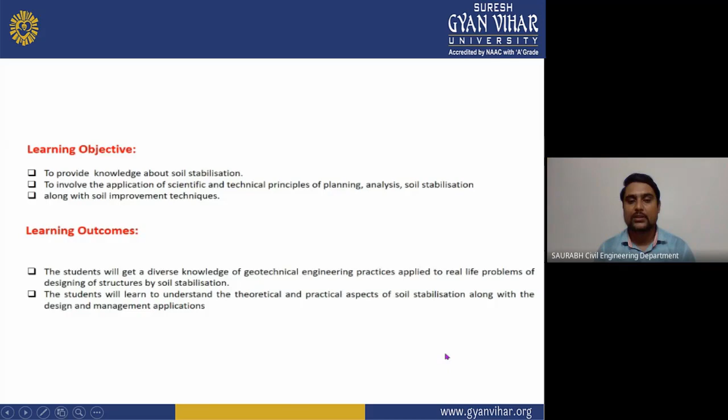So come on to our topic. First one is soil stabilization. Here we will see what is the definition of soil stabilization. Generally, soil stabilization is termed as the improvement process under the situation when the influence zone is limited to less than 1 meter, which is called surface stabilization.

It is a geotechnical process of improving the engineering properties of soil. In properties of soil, density and shear strength, and C and phi factor are improved, while compressibility, settlement, and permeability are reduced, making it more stable and durable. This is called ground improvement.

Stabilization of soil implies the modification of the properties of the soil, water, air system in order to obtain lasting properties which are compatible with the particular application.

The parameters involved are properties of soil to be stabilized, planned improvements, project economics, construction techniques, and maintenance of the project. These are some parameters which are involved in soil stabilization.

What is the objective of soil stabilization? We will see here. The main objective of soil stabilization is reducing the volume of voids, which is equal to reducing porosity. Filling the voids that cannot be eliminated is equal to reducing permeability. Increasing the bonding between grains is equal to increasing mechanical strength.

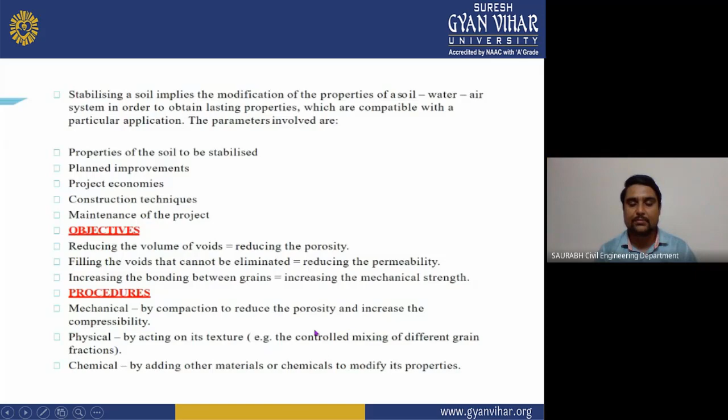There is also a procedure, and there are three procedures which are used in soil stabilization: first mechanical, physical, and chemical procedures. So here is the procedure. As I told you, there are three procedures: mechanical, physical, and chemical.

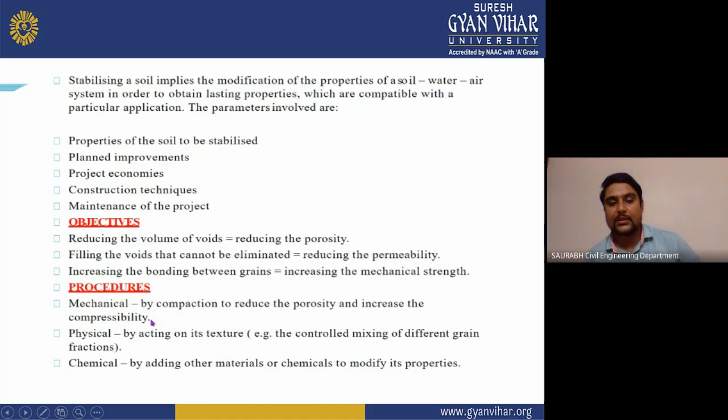Come on to surface stabilization. What is surface stabilization? Surface stabilization can be done by four methods: mechanical stabilization, physical stabilization, chemical stabilization, and physiochemical stabilization.

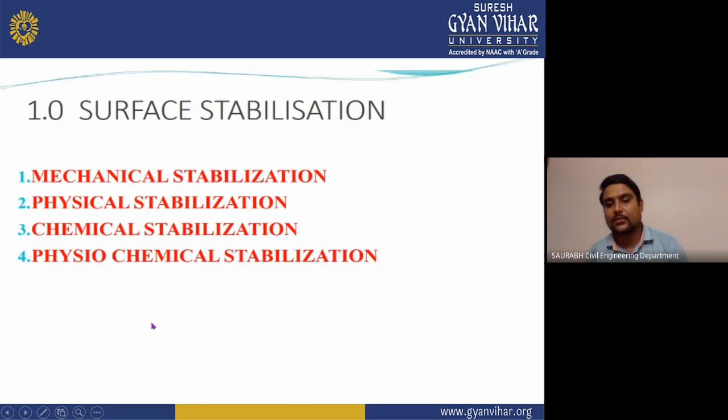Come on to mechanical stabilization. In this technique, mechanical energy is used, like roller plate compaction, by the choice based on the nature of soil to improve the soil properties by compaction, preferably for the construction of embankments for roads, railways, etc. Mechanical stability depends on the degree of compaction. Normally, compaction is done at the optimum water content.

What are the uses of mechanical stabilization? It is the simplest method of soil stabilization to improve the subgrade of low bearing capacity, and is extensively used for the construction of base and subbase and surfacing of roads.

Here is mechanical stabilization, and we will see what factors affect mechanical stabilization. The mechanical stability of mixed soil depends on the following factors: mechanical strength of aggregate. The mixed soil is stable if the aggregate used has high strength. However, if the mixture is properly designed and compacted, even aggregate of relatively low strength can provide good mechanical stability.

Mineral composition: the mechanical stability of mixed soil depends upon the composition of the minerals. The minerals should be weather resistant.

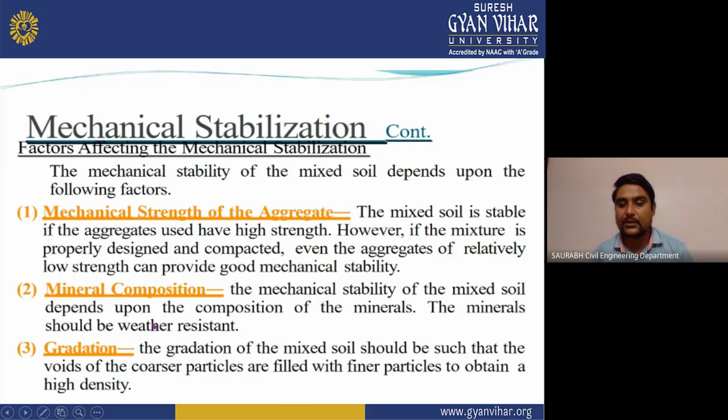Gradation: the gradation of the mixed soil should be such that the voids of the coarser particles are filled with finer particles to obtain a high density.

Here you can see the plasticity characteristics. For mud road surfacing, highly plastic soils are used as a binder. They possess greater cohesion, moisture retention capacity, and provide a seal against downward movement of surface water. For the base course, the soil should have low plasticity to avoid excessive accumulation of water and the resulting loss of strength.

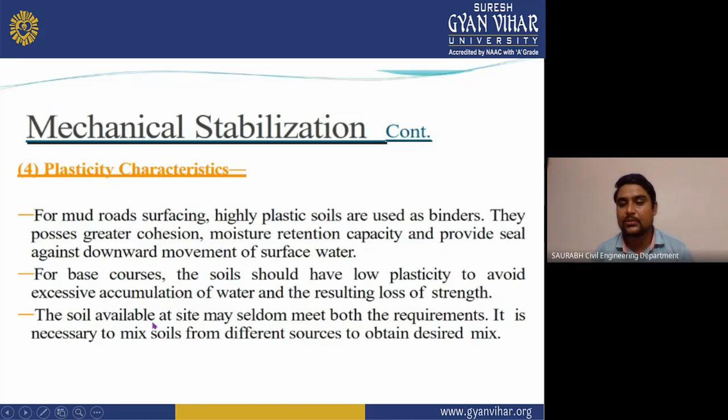The soil available at the site may seldom meet both requirements. It is necessary to mix soil from different sources to obtain the desired mix. Here is physical stabilization: in this technique, two or more soils are blended to improve the physical properties of weak soil.

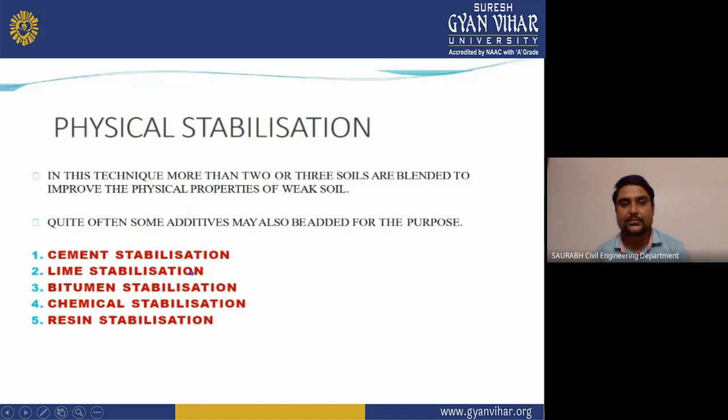Additives may also be added for the purpose of stabilization: cement stabilization, lime stabilization, bitumen stabilization, chemical stabilization, and resin stabilization. First we will see cement stabilization, the most commonly used for road construction.

Heavy clays are difficult to pulverize and not suitable. Well-graded sand and gravel mixture with up to 10% fine binding materials is preferred. Quantity of cement is determined on trial basis in the lab. Minimum strength required for this kind of soil is 3.5 Newton per mm square at 7 days cube strength. Compaction is to be done within 2 hours after laying and mixing with water. The central plant method is also faster construction, though expensive: dry mix, then wet thoroughly, followed by spreading and compaction.

The mix-in-place method is similar to an agricultural rotary cultivator. First the soil is pulverized, then dry cement is spread over it. Then water is sprinkled in a layer, remixed and shaped, and compacted using a roller.

Here is cement stabilization, normal soil-cement stabilization. It consists of 5 to 14% cement by volume, sufficient to produce a hard and durable material. Sufficient water is used for the hydration requirement and workability. It is weather resistant and strong, used for stabilizing sandy and other low plasticity soils.

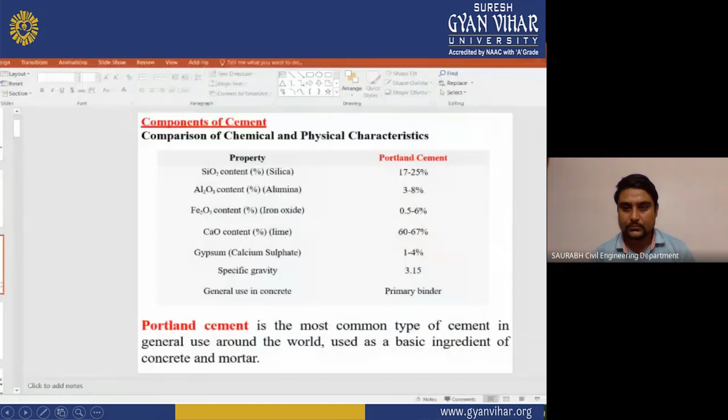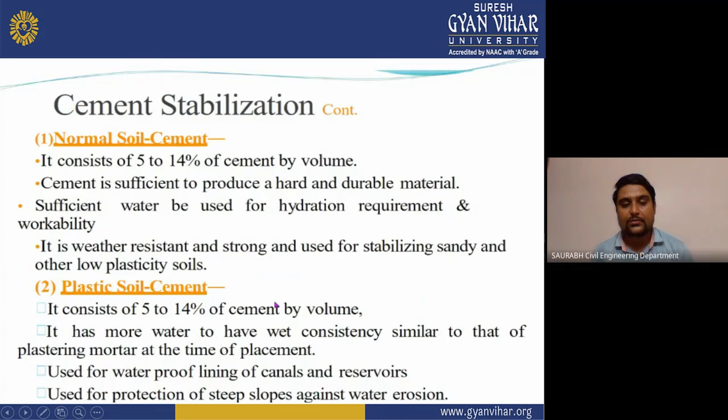It consists of 5 to 14% of cement by volume. It has more water to achieve a wet consistency similar to that of plastering mortar at the time of placement. It is used for the waterproof lining of canals and reservoirs, and for the protection of steep slopes against water erosion.

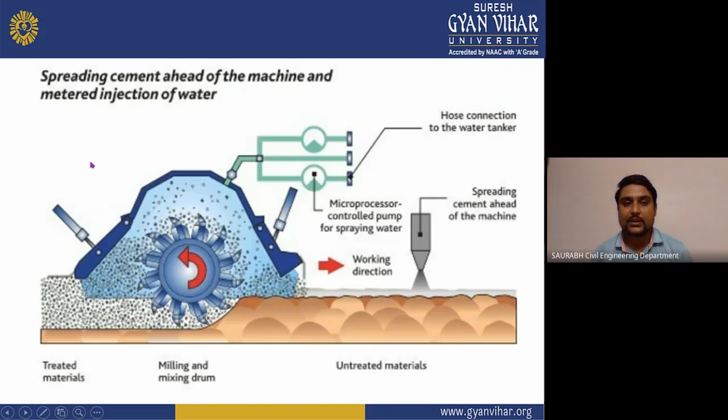Here you can see the treated material, and this is the milling and mixing drum, and that is the untreated material. This shows spreading, where cement is spread ahead of the machine and metered and injected with water. Now you can see the soil stabilization using cement, known as GLORIT Step 3.

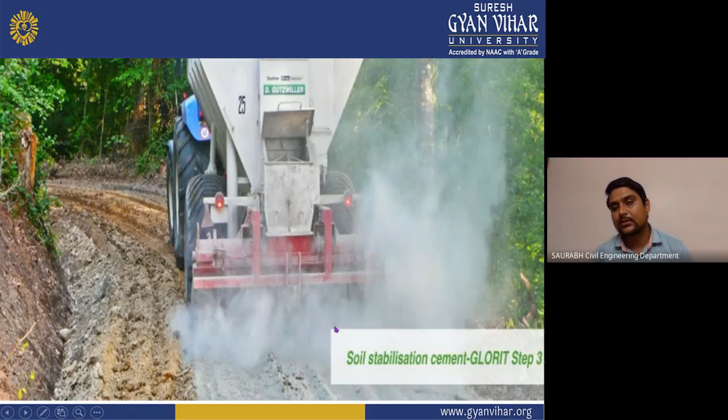Now we will see lime stabilization. There are basically five types of lime: high calcium quicklime, hydrated high calcium lime, dolomite lime, normal hydrated dolomite lime, and pressure hydrated dolomite lime. Quicklime is more effective than hydrated lime, but the latter is safer and more convenient to handle, so generally hydrated lime is used. It is also known as slaked lime.

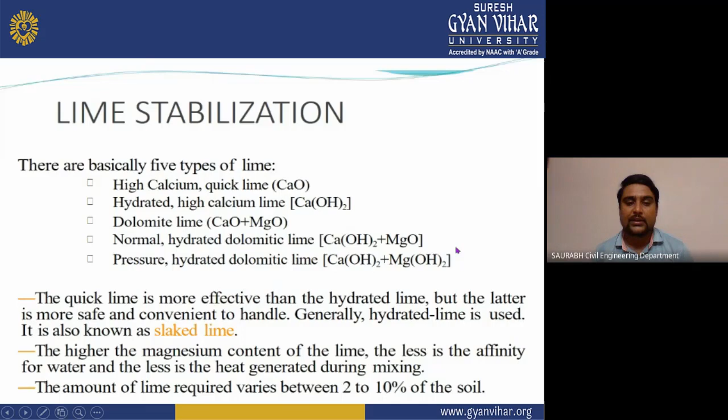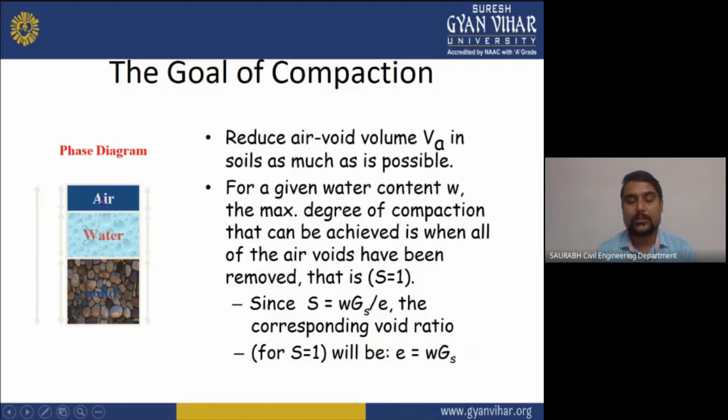What is the main goal of compaction? We will see this first diagram, showing air, water, and solids. The goal of compaction is to reduce the air voids volume VA in the soil as much as possible. For a given water content W, the maximum degree of compaction achievable is when all the air voids have been removed, that is, saturation S equals 1. Since S equals WGS upon E, the corresponding void ratio for S equal to 1 becomes E equals WGS.

Now we will see the principle of compaction. The degree of compaction of soil is measured by the dry unit weight. The dry unit weight of soil increases as compaction is done. The more compacted the soil, the higher its dry density compared to normal soil, and the higher its dry unit weight gamma D will be.

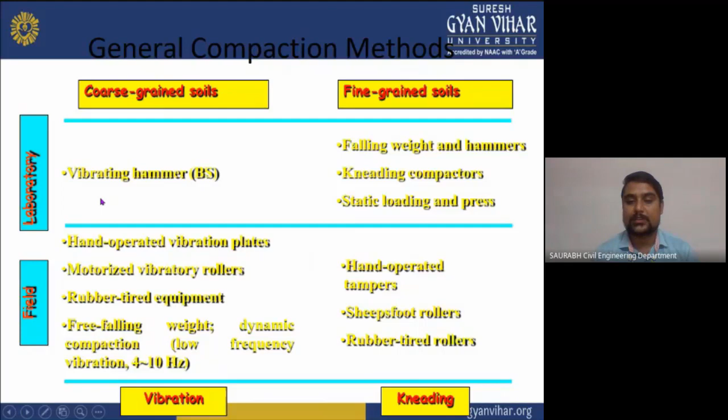In the laboratory, we have to use a vibrating hammer, known as BS. For fine grained soil, we use the falling weight and hammer, kneading compactor, and static load and press. In the field we use hand operated vibrator plates, motorized vibrator roller, rubber tire equipment, free falling compaction vibration weight and dynamic frequency, and hand operated tamper. Sheepsfoot roller and rubber tire roller are also used for soil compaction, along with the standard Proctor test.

First we will see the standard Proctor test, and how we conduct it.

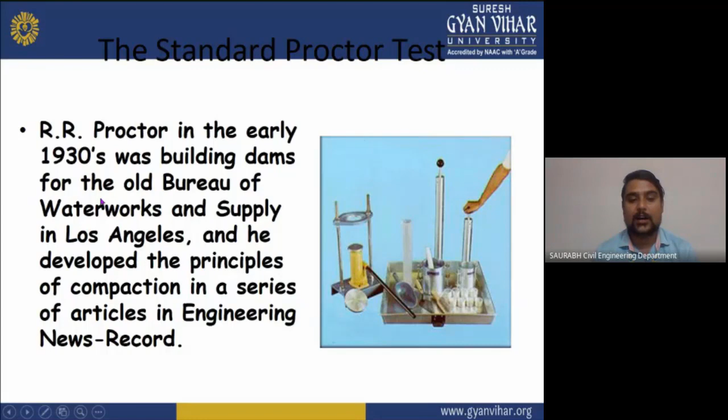R.R. Proctor, in the early 1930s, was building a dam for the old Bureau of Water Works and Supply in Los Angeles, and he developed the principle of compaction in a series of articles in Engineering News-Record.

Variables of compaction are shown here. Proctor established that compaction is a function of four variables. First is dry density, represented by rho d or dry unit weight gamma d, then water content W, compactive effort energy E, and soil type gradation, presence of clay and minerals.

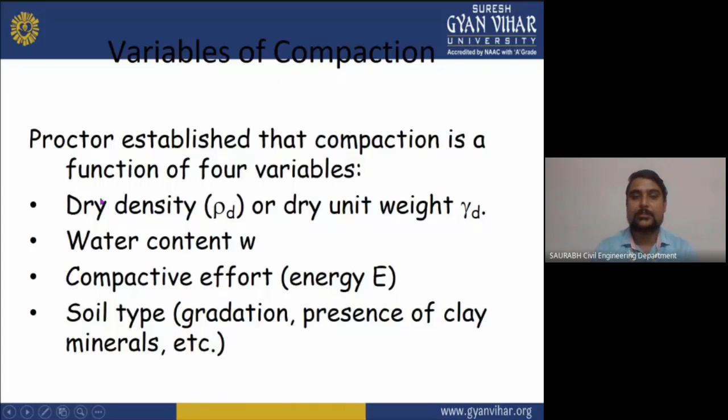These are the variables which affect compaction, and you can also say this is the compaction function for the variables. Now we will see the compaction Proctor test here.

As you can see here, first is the standard Proctor mold, required one piece. Standard Proctor hammer will be required, one piece. Extruder will be required, one set, and square pan will be required, one set.

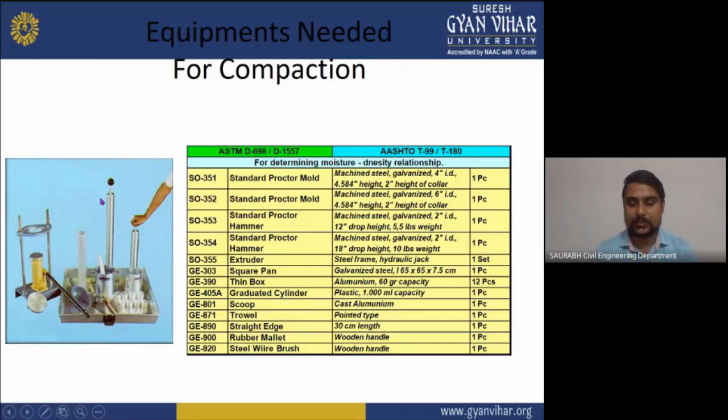Tin box will be required, 12 pieces. Graduated cylinder will be required, one piece. Scoop will be required, one piece, and trowel will also be required, one piece. These are the equipments needed for doing the compaction of soil.

The soil standard Proctor test: the soil is mixed with varying amounts of water to achieve different water contents. For each water content, the soil is compacted by dropping a hammer 25 times onto the confined soil.

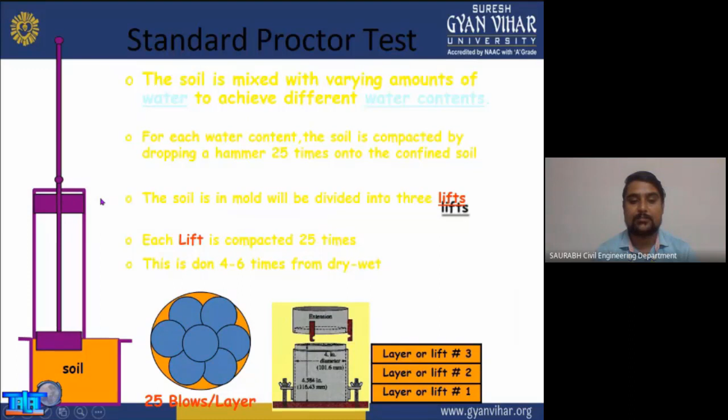The soil mold is divided into three lifts. Each lift is compacted 25 times, so each soil sample is divided into three layers, and each layer is compacted 25 times. This is done 4 to 6 times, and this will be the pattern of doing the compaction here.

Now, what is the standard energy? Standard energy is also a factor involved in the compaction of soil. Compactive effort applied to the soil per unit volume is shown here in the graph, which we have to plot during the compaction by the standard Proctor test.

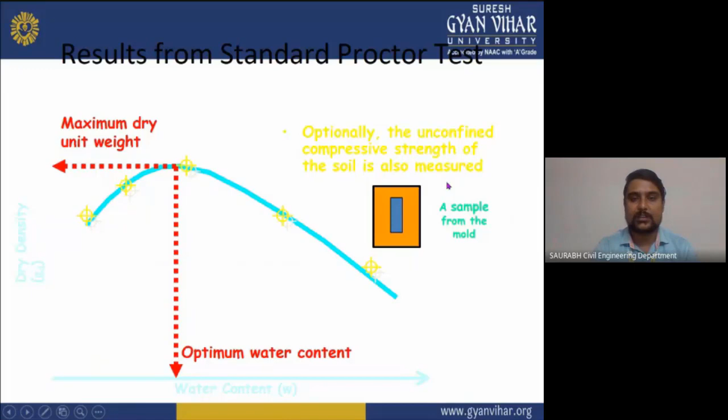Now we will see the Proctor principle of compaction using standard energy. If a series of soil specimens are compacted at increasing water content, the resulting dry density of the specimen will vary. The density will increase to a peak value, then decrease.

So you can understand what we have to do. We have to vary the water content, and then we will get the maximum density. Then we stop, and at that point we get our MDD, known as maximum dry density, after which the density will decrease as mentioned here.

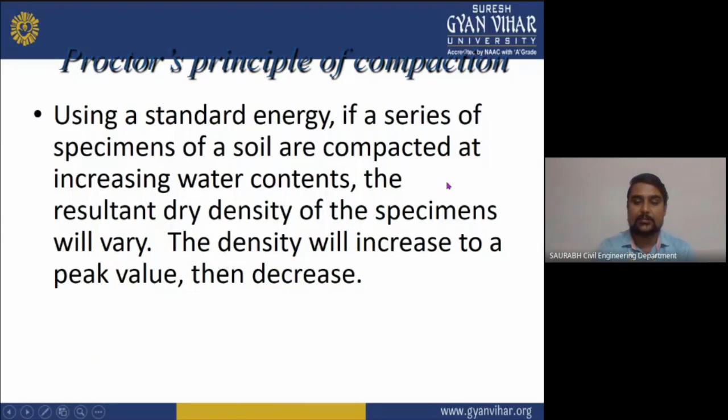Principle of compaction: a plot of dry density versus the water content from the compaction test will be parabolic in its shape. The peak of the curve is termed the maximum dry density, as I told you, MDD, and the water content at which the peak occurs is the optimum water content, which is known as OWC.

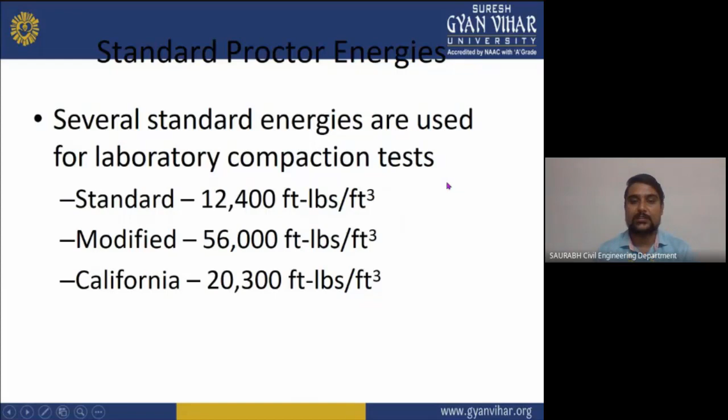And here, several standard energies are used for the laboratory compaction test. The first one is standard, then modified, and California, and there are different values of energy involved in doing the compaction of a soil. Now we will see the summary of a standard Proctor test here.

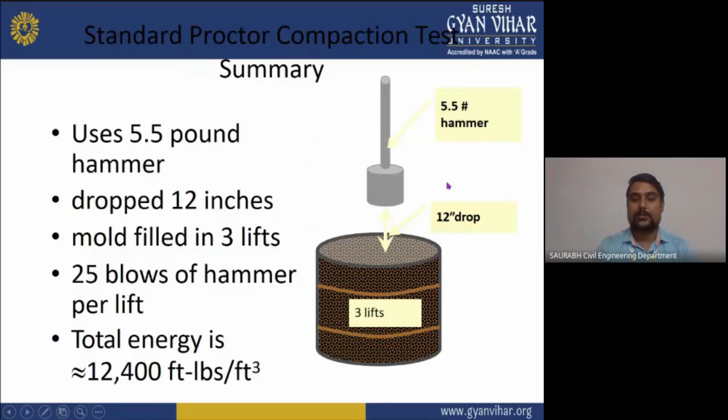As you can see, there is your hammer, which has a weight of 5.5 pounds, and there is also the drop distance, which is given here as 12 inches. It uses a 5.5 pound hammer, a 12-inch drop, the mold filled in three lifts, 25 blows of the hammer per lift. The total energy consumed here, as you can see, is 12,400 foot-lbs per cubic foot. And here, as you can see, is the same thing.

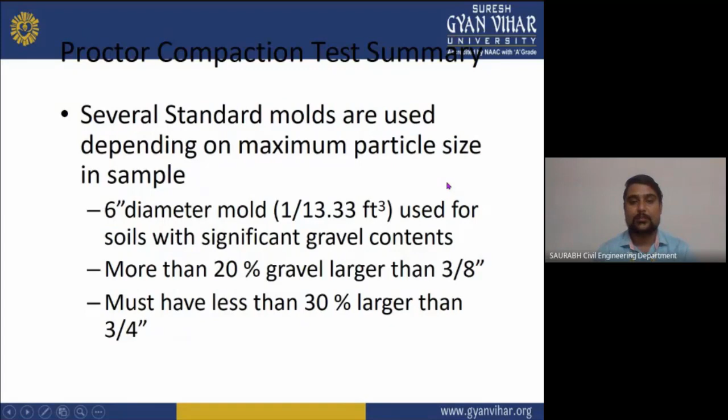Now we come to the several standard molds used depending on the maximum particle size of the sample. A 4-inch diameter mold, which is equal to 1/30 cubic feet, is used for the low gravel content method, a soil with less than 20% gravel. Method B is for soil with greater than 20% gravel and 20% larger than 3/8 inch.

And now we come to how you have to do the compaction Proctor test. First, you have to prepare 4 to 5 specimens at increasing water content about 2% apart. For example, prepare samples at 14, 16, 18, and 20%. Use a range of moisture based on feel and experience.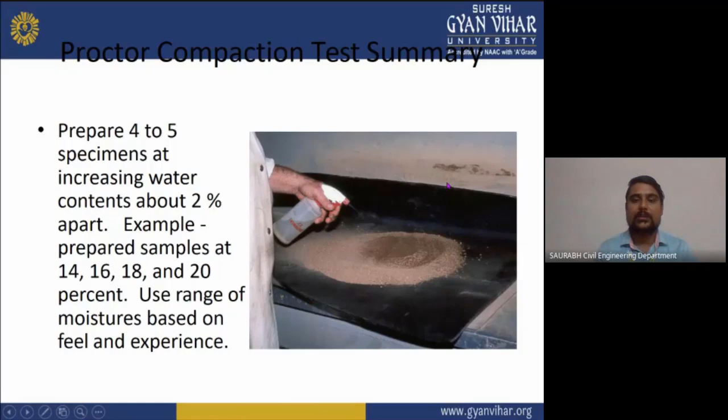Like here, as you can see, you have to use the water content in the soil. First you use 14%, after that 16, 18, 20, and you have to repeat this percentage of water in the soil until you get your maximum dry density. Here you can see the Proctor compaction test summary.

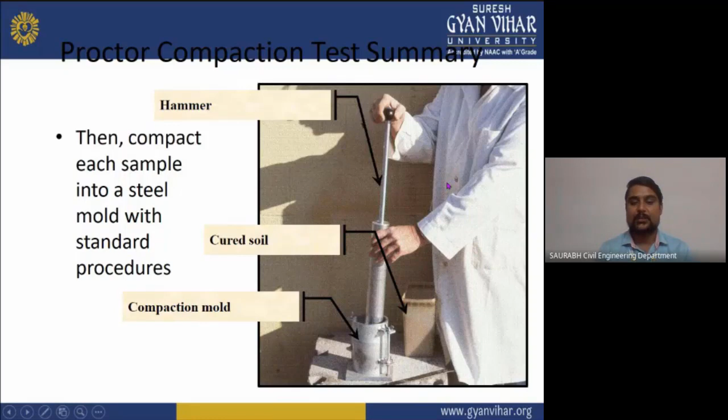The hammer then compacts each sample into the steel mold with the standard procedure, and the cured soil is here and the compaction mold is also here. Now we will see what will be next. Then strike off excess soil so that the mold has a known volume of soil. As you can see here, we have to strike off the excess amount of soil from this mold so that we can get the exact volume of soil.

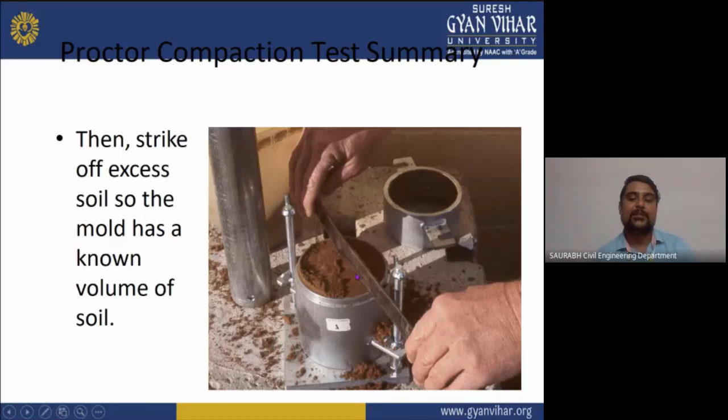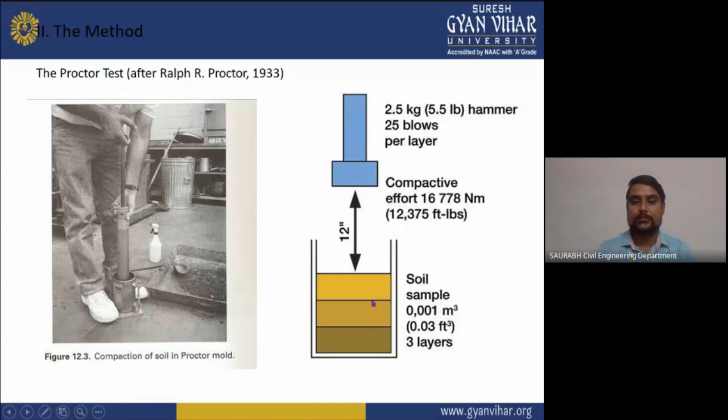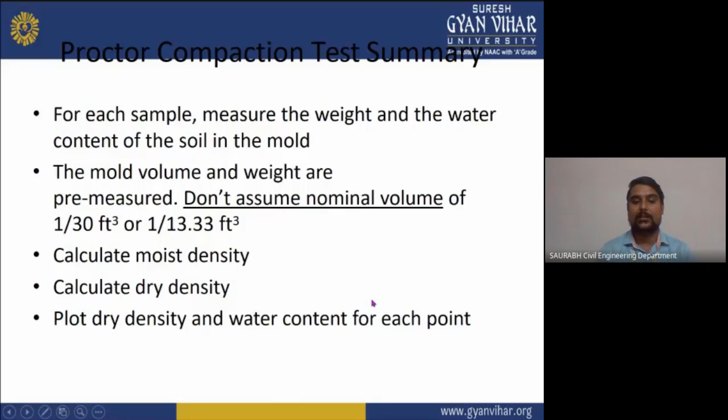And now, what we have to do in the Proctor compaction test summary: for each sample, measure the weight and the water content of the soil in the mold. The mold volume and weight are pre-measured. Don't assume nominal volume of 1/30 cubic feet and 1/13.33 cubic feet. Calculate the moist density, calculate the dry density, and plot dry density and water content for each point.

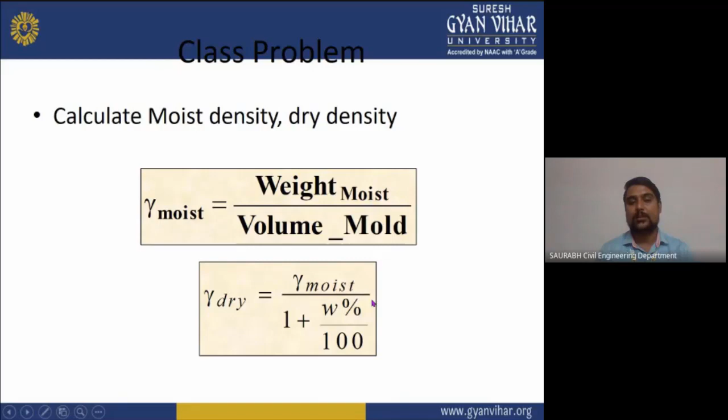As you can see here, what is the problem? Calculate the moist density and dry density. This will be the formula which we will use during the calculation of the moist weight of a soil. As you can see here, this is your formula.

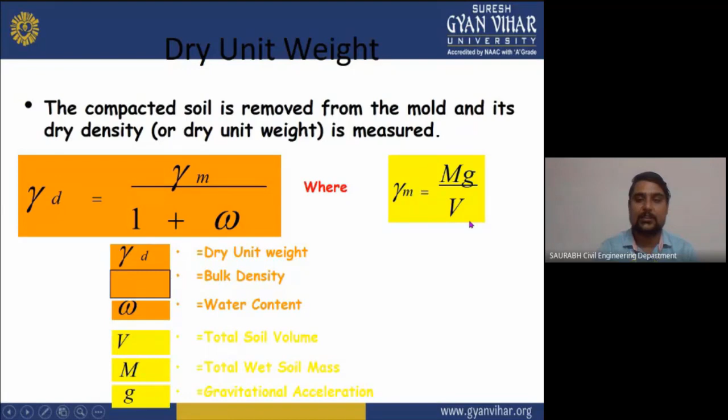And now we have to see the dry unit weight. The compacted soil is removed from the mold and its dry density, which is also known as dry unit weight, is measured by gamma m upon 1 plus w. As you can see, gamma d is equal to dry unit weight, w will be the water content, V will be the total volume of soil, M will be the total mass of the wet soil, and g will be the gravitational acceleration. As you can see here, gamma m equals Mg upon V. We have to put the data in this formula, and we will get the dry unit weight of that soil.

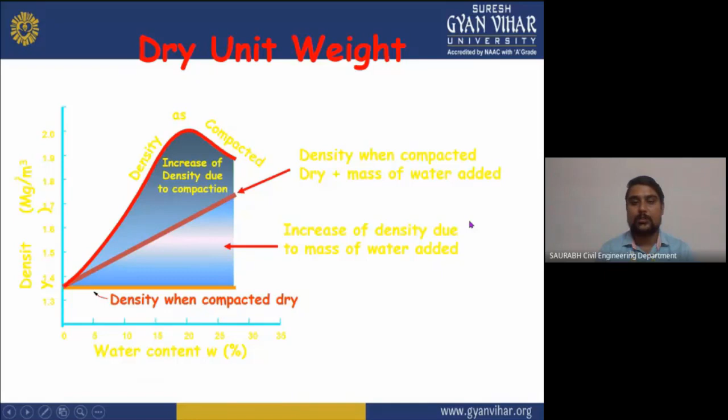And here is how the modified Proctor test was developed. Now we will come to the modified Proctor test. We have done the standard Proctor test. It was developed during World War II by the US Army Corps of Engineers for a better representation of the compaction required for airfields to support heavy aircraft, as you can see here.

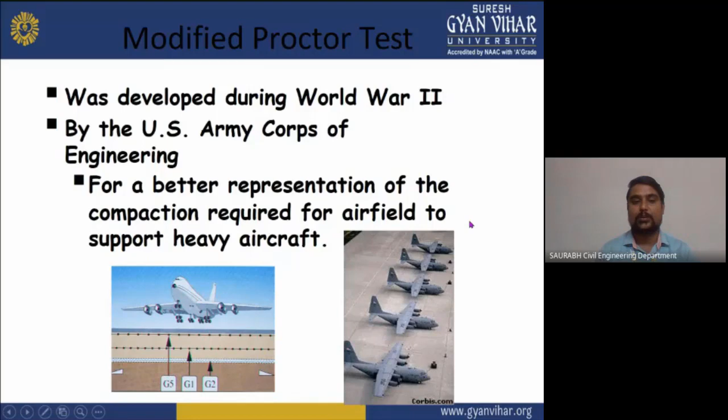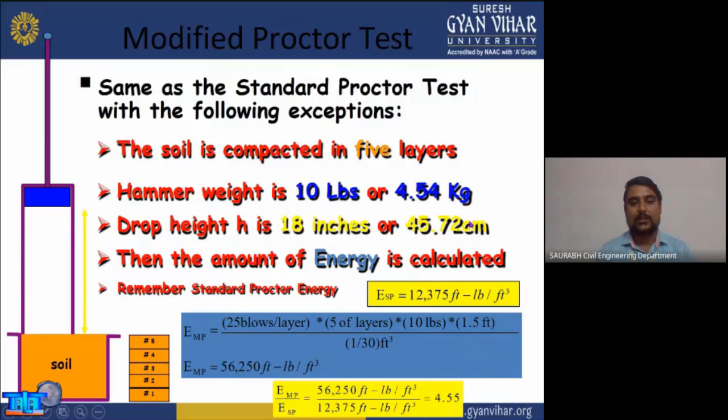The modified Proctor test is the same as the standard Proctor test with the following exceptions. The soil is compacted in 5 layers, the weight of the hammer will be 10 lbs, and the drop height will be 18 inches. That is the difference between the modified Proctor test and the standard Proctor test, and this is the graph of a modified Proctor test and a standard Proctor test. You can see here.

Now we will see the comparison summary of the standard Proctor test and modified Proctor test. Mold size will be 1/30 cubic feet, and here will also be 1/30 cubic feet. 12 inches is the height of drop, and here the height of drop is 18 inches. 5.5 lb hammer, and the weight of hammer will be more in the modified Proctor test, and there will be 3 layers in the standard Proctor test, and there will be 5 layers. And this is the difference, which is very important to know: what is the difference between the standard Proctor test and the modified Proctor test.

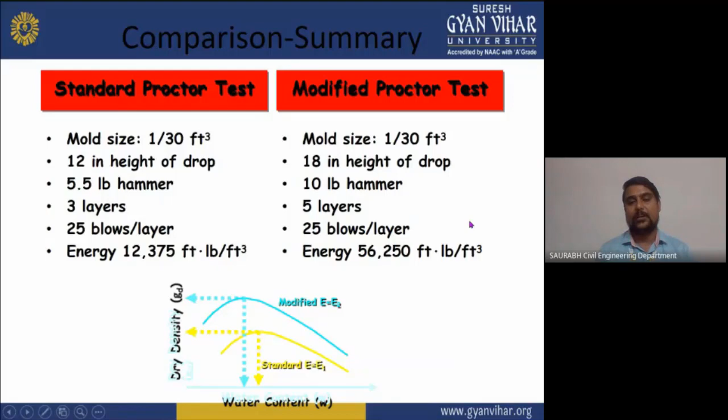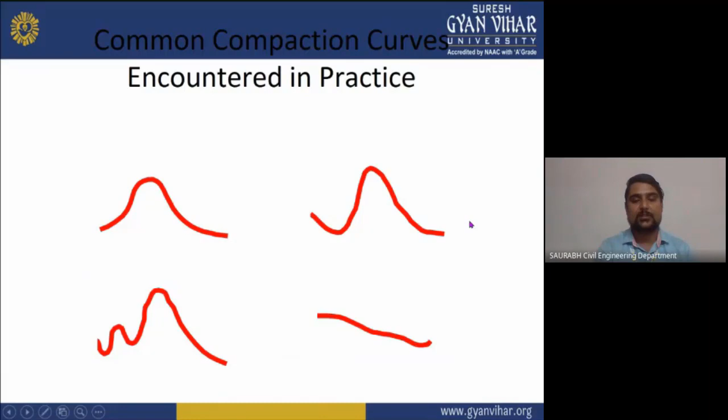Now you can see this is the curve which you will get during the compaction of a soil. Now we will see what is the zero air voids. As you can see here, the figure is showing the dry density and water content relationship, and this is also known as the degree of saturation graph. And ZAV, as you can see here, is known as zero air voids. The curve represents the fully saturated condition, where S will be equal to 100%, and ZAV cannot be reached by compaction.

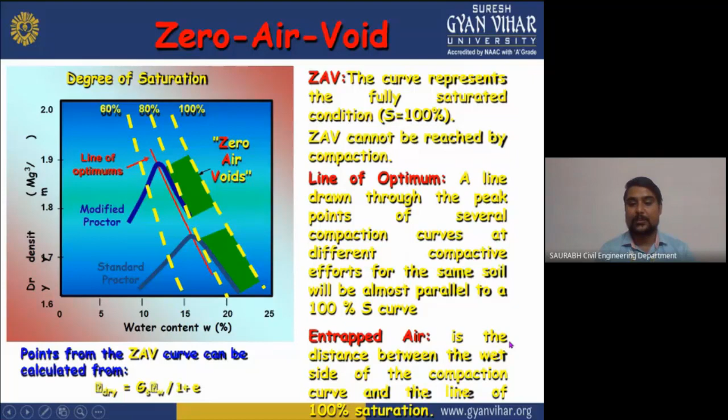Line of optimum: as you can see here, a line drawn through the peak points of several compaction curves at different compactive efforts for the same soil will be almost parallel to the 100% S curve. And there is also entrapped air, as you can see here in the graph. It is the distance between the wet side of the compaction curve and the line of 100% saturation.

Now we will see the results. What will be the results on the dry of optimum? As the water content increases, the particles develop larger and larger water films around them, which then lubricate the particles and make them easier to be moved about and reoriented into a denser configuration. Here is also hammer impact: the air expelled from the soil upon impact is larger in quantity than the volume of water added.

And here is also wet of optimum. What is the meaning of wet of optimum here? Water starts to replace the soil particles in the mold, and since rho w will be less than rho s, the dry density starts to decrease. Hammer impact: what is the hammer impact? Moisture cannot escape under the impact of the hammer. Instead, the entrapped air is energized and lifts the soil in the region around the hammer. So these are the result explanations of compaction.

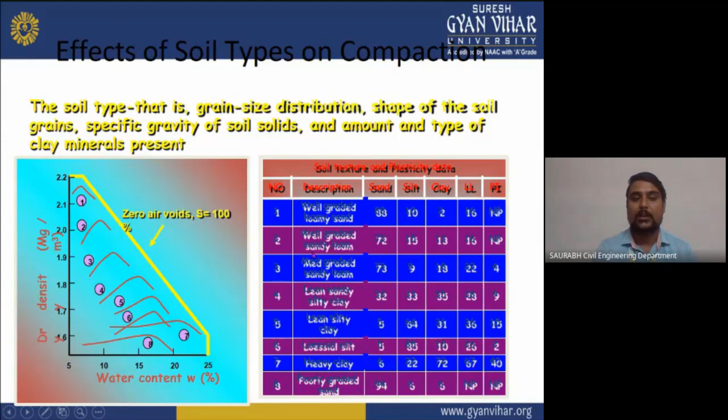Now we will see the effect of soil types on the compaction. What will be the effect of soil type on the compaction? The soil type, that is grain size distribution, shape of the soil grain, specific gravity of soil solids and amount and type of clay mineral present. As here you can see the compaction characteristics. What is the meaning of the compaction characteristics?

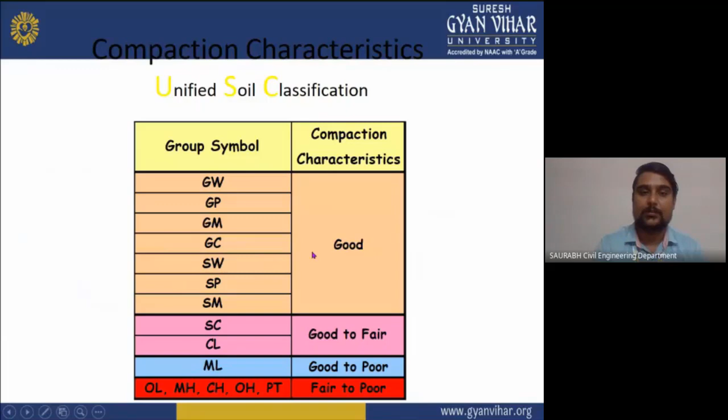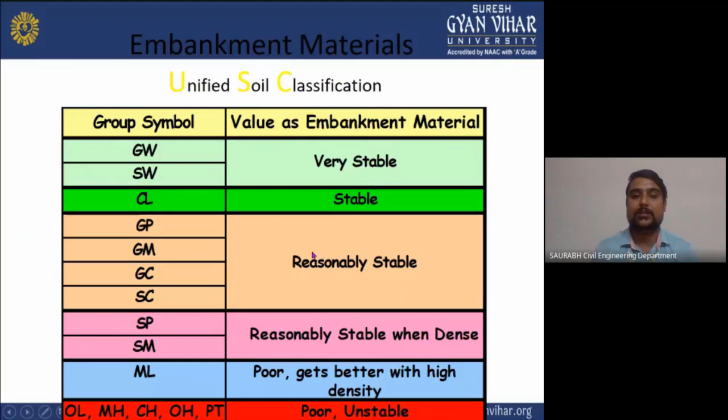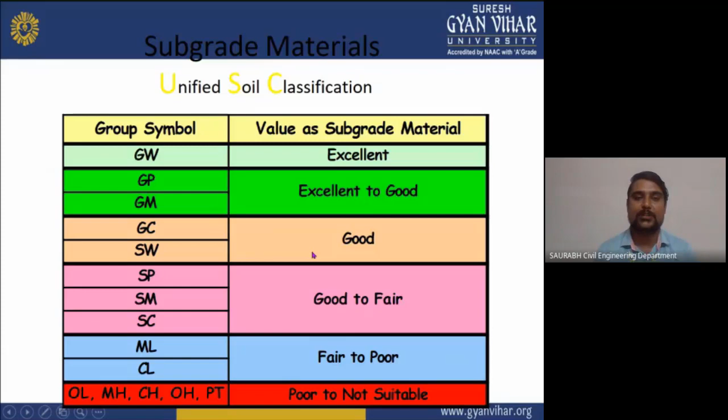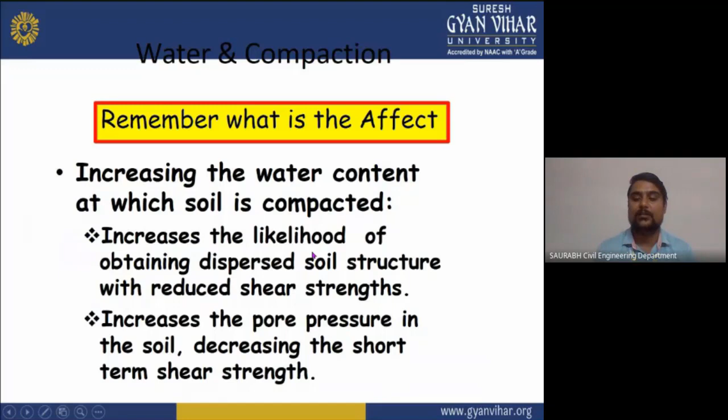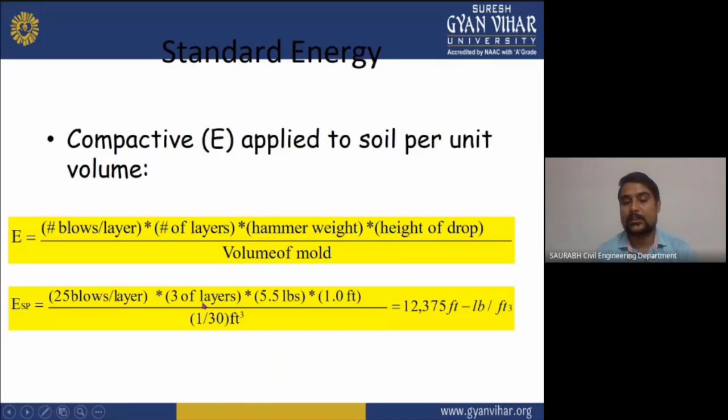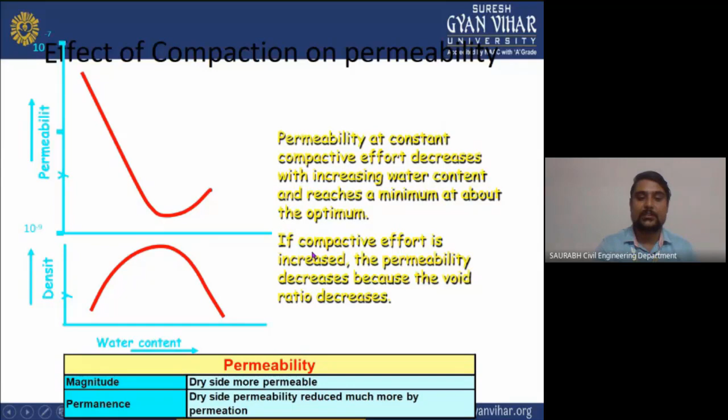Effect of the compaction on permeability. This graph is showing the effect of the compaction on the permeability: at constant compaction effort it decreases with increased water content and reaches a minimum at about the optimum. If compactive effort is increased, the permeability decreases because the void ratio decreases. This is the graph which is showing relationship between water content and density and water content and permeability.

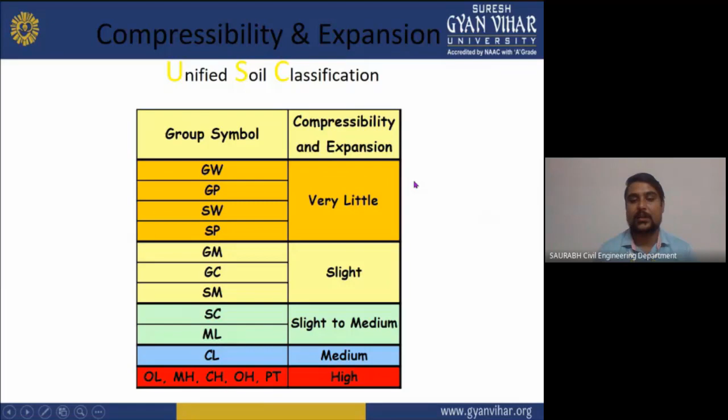Now we will see the compressibility and expansion in the unified soil classification. Here is a group symbol which is also showing the compressibility and expansion of these soils. As you can see here, these four soils will give very little, this is very slight, and this will be slight to medium and medium to high. And this is also the group symbol which is showing the compressibility and expansion relationship of a soil.

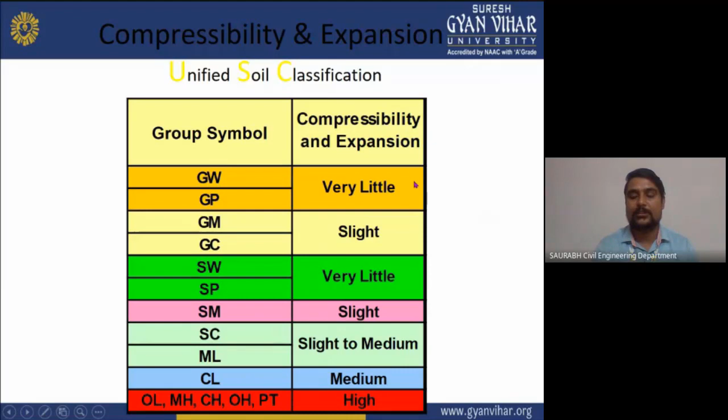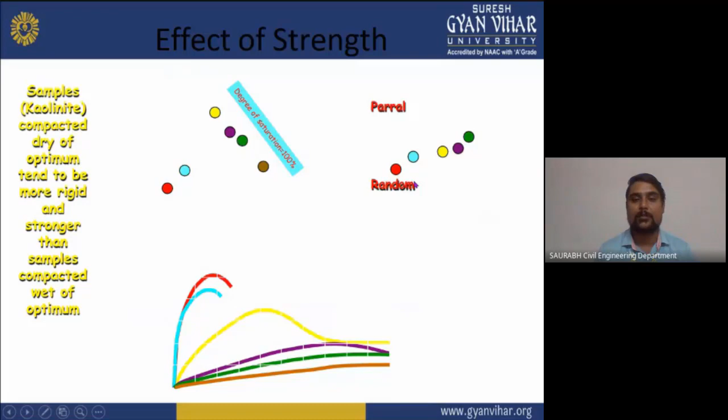Now you can see here what will be the effect on the strength. Samples of kaolinite compacted dry of optimum tend to be more rigid and stronger than samples compacted wet of optimum. Okay, we were on lime stabilization.

The higher the magnesium content of the lime, the less is the affinity for water and the less heat generated during mixing. The amount of lime required varies between 2 to 10% of the soil. Here is lime stabilization. Lime stabilization is done by adding lime to soil. So you can understand what we have to do in lime stabilization.

We have to use lime with the soil, and it helps to improve the bearing capacity of soil. It is useful for the stabilization of clay soil. When lime reacts with the soil, there is exchange of cations in the adsorbed water layer and a decrease in the plasticity of the soil occurs. The resulting material is more friable than the original clay and is therefore more suitable as the subgrade.

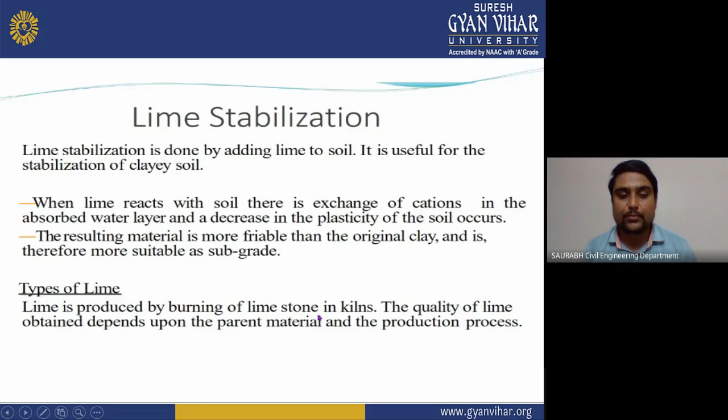Here, types of lime. Lime is produced by the burning of limestone in kilns. The quality of lime obtained depends upon the parent material and the production process. The following amounts of lime may be used as a rough guide: 2 to 5% for clay gravel material having less than 50% of silt-clay fraction, 5 to 10% for soil with more than 50% of clay fraction, about 10% for heavy clay used as a base and subbase.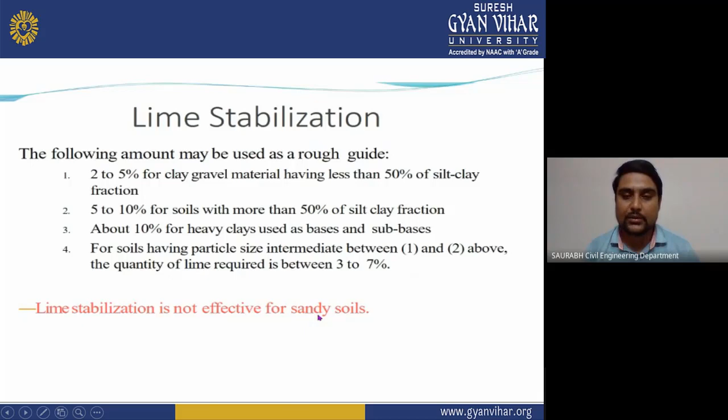For soil having particle size intermediate between 1 and 2 above, the quantity of lime required is between 3 to 7%. Lime stabilization is also not effective for sandy soil. You cannot do lime stabilization in sandy soil.

Construction method. What is the construction method of lime stabilization? Construction methods used in lime stabilization are similar to those in cement stabilization. However, the following points should be carefully noted. The reaction in the case of lime is slow. There is no maximum time limit between the addition of lime to the soil and the completion of the compaction. Lime may be added in the form of slurry instead of dry powder.

A rest period of 1 to 4 days is generally required after spreading lime over heavy clay before the final mixing is done. The soil-lime is compacted to the required maximum dry density. After compaction, the surface is kept moist for 7 days and then covered with a suitable wearing coat.

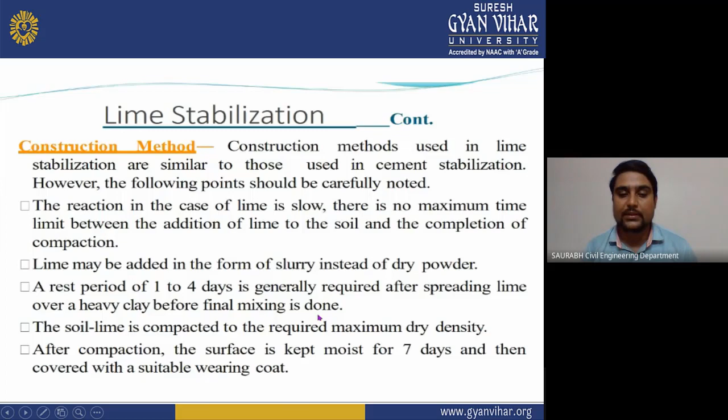Chemical and physical changes in lime stabilization we will see here. Lime reacts with the wet soil and alters the nature of the adsorbed layer as the calcium ions replace the sodium or hydrogen ions. The double layer is depressed due to the increase in cation concentration but sometimes expands due to the high pH value of lime. Lime reacts chemically with the silica and alumina in soil and forms a natural cement composed of calcium aluminosilicate.

In lime stabilization, liquid limit decreases, plastic limit increases. Plasticity index decreases also. Soil becomes more friable and workable. The strength of soil is improved. Unconfined compressive strength is increased up to 60% and modulus of elasticity of soil also increases. Lime causes a decrease in the tendency of attraction of water.

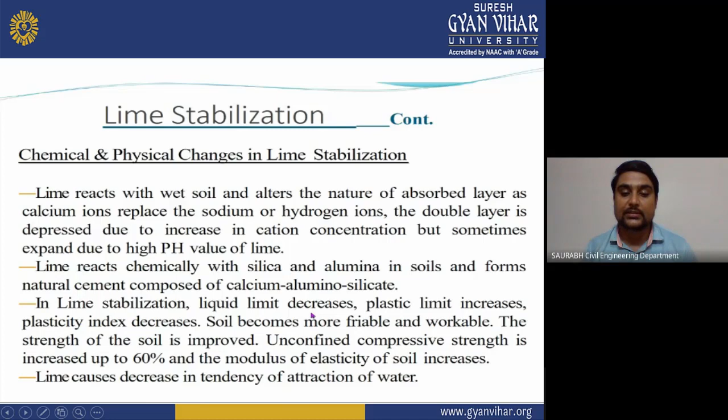Soil resistance to water absorption, capillary rise, and volume changes on wetting or drying is increased. Lime stabilized base and subbase form a water resistant barrier, which stops penetration of rainwater. Optimum water content is increased and maximum dry unit weight is decreased. In swampy areas where water content is above the optimum, it helps in drying of the soil. So we have to do lime stabilization where we need to improve the bearing capacity of soil.

Now we will come to fly ash soil stabilization. As we all know, fly ash is a pozzolanic material. It reacts with lime and is therefore almost always used in combination with lime in soils having little or no plastic fines. It has often been found desirable to use a small amount of Portland cement with the lime and fly ash for added strength. This combination of lime, cement and fly ash, also known as LCF, has been used successfully in base course stabilization.

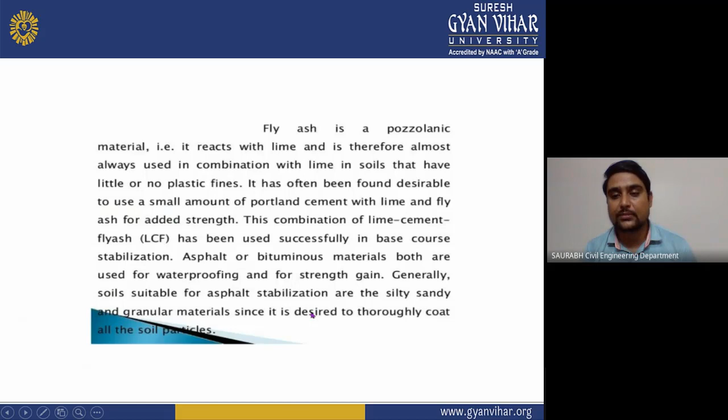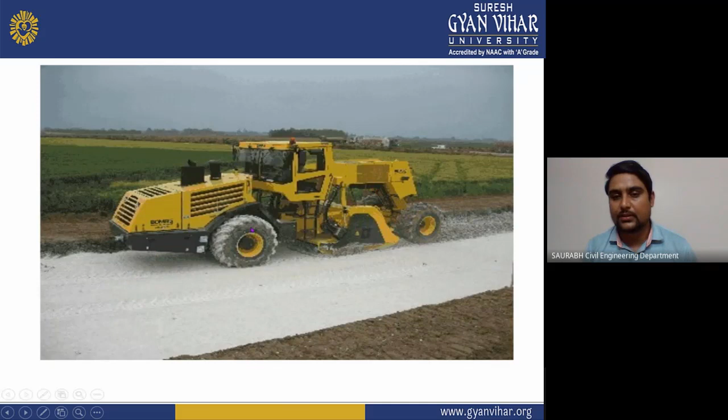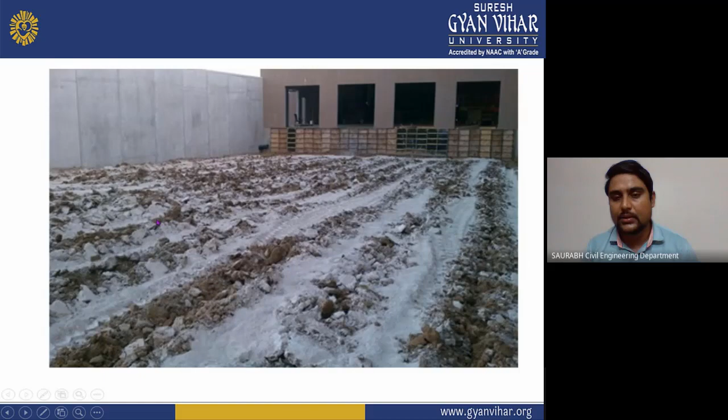So this is the roller by which we can do the soil stabilization by adding lime. Here you can see there is a white color, which is your lime, mixed with the fly ash, and then we have to mix it with water and your soil bearing capacity will be improved. Now as you can see, this is also a method of improving the soil bearing capacity by soil stabilization.

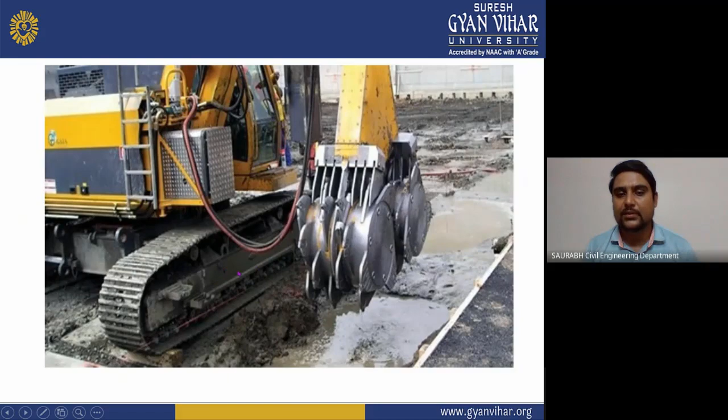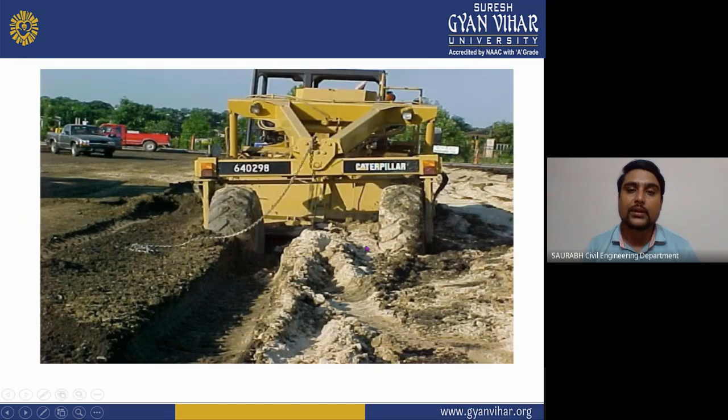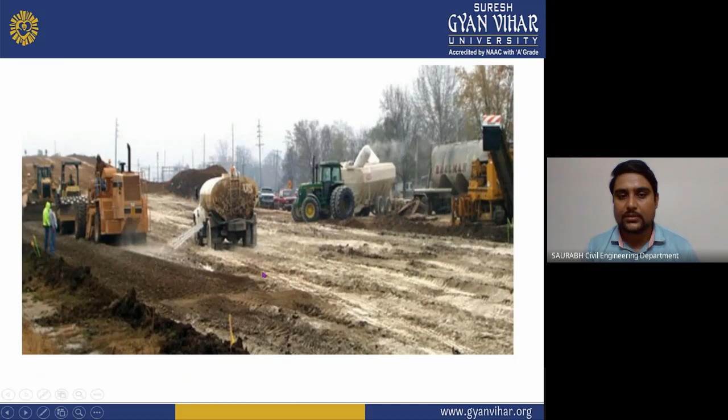These are the images which are showing the soil stabilization method. Now we will come on the next topic, bituminous stabilization. Here we have to use the bitumen for the soil stabilization. Any inorganic soil which can be mixed with the asphalt is suitable for the bituminous soil stabilization. In cohesionless soil, asphalt binds the soil particles together and serves as the binding agent.

In cohesive soil, asphalt protects the soil by plugging its voids and waterproofing it. It helps to maintain low moisture content and to increase the bearing capacity. The amount of bitumen required varies between 4 to 7% by the weight. Now come on the MCQs.

First question is there. A grillage foundation is provided for heavy isolated column, or it is treated as a spread foundation, consists of two sets of perpendicularly placed steel beams. So here right answer will be D, all of the above. Come on the next question.

Effective stress on soil: increase void ratio and decrease permeability, increase both void ratio and permeability, decrease both void ratio and permeability, decrease void ratio and increase permeability. And here right answer will be decrease both void ratio and permeability. Come on the third question.

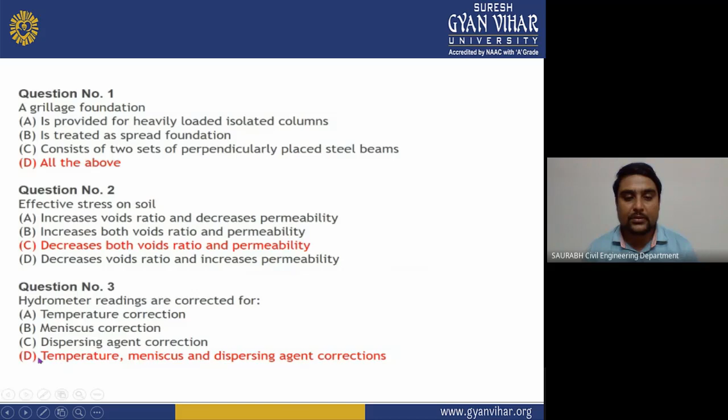Hydrometer readings are corrected as temperature correction, meniscus correction, dispersion agent correction, temperature, meniscus and dispersion agent correction. So right answer here will be hydrometer is used for all these points which are given in the D. Right answer will be D.

Now on the fourth question, the ultimate consolidation settlement of a structure resting on soil: decrease with increase in the initial void ratio, decrease with the decrease in the plastic limit, increase with the initial void ratio, increase with the decrease in the porosity of the soil. Here right answer will be decrease with the increase in the initial void ratio. Come on the fifth question.

Select the incorrect sentence. In direct shear box test, the plane of shear failure is predetermined. Better control is achieved on the drainage of the soil in the triaxial compression test. Stress distribution on the failure plane in case of the triaxial compression test is uniform. Unconfined compressive test can be carried out on all types of soil. Here right answer will be D. As you can see, D will be your right answer.

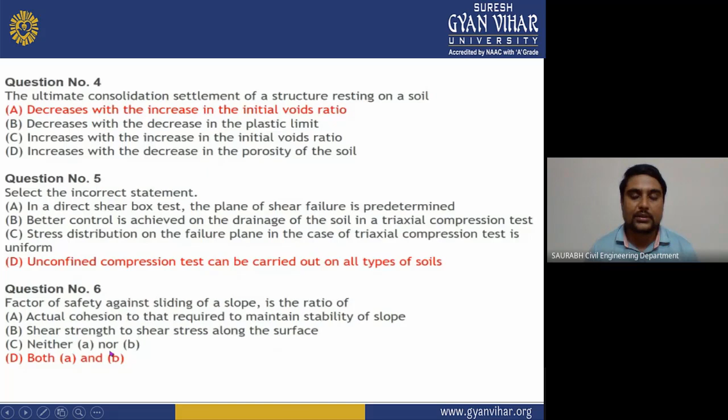This statement is incorrect. Come on the sixth question, which is: factor of safety against sliding of slope is the ratio of actual cohesion to that required to maintain stability of slope, shear strength to shear stress along the surface, neither A nor B. Here right answer will be both A and B. D will be your right answer. Come on the seventh question.

The angle of internal friction is least for angular grain loose sand, angular grain dense sand, round grain loose sand, and D option is clay, which is your right answer. D will be your right answer. Dispersed type of soil structure is an arrangement comprising particles having, here options given: face to face or parallel orientation, edge to edge orientation, edge to face orientation, and all of the above. Here, right answer will be face to face or parallel orientation.

Now, on the ninth question, the neutral stress in the soil mass is force per neutral area, force per effective area, stress taken by the pore water, stress taken by the solid particle. Here, right answer will be stress taken up by the pore water.

Now, on the next question, the coefficient of compressibility of soil is the ratio of stress to strain, strain to stress, stress to settlement, and rate of loading to that settlement. Here, right answer will be B, strain to stress. These are the very important questions, and these may be asked in your weekly test, and this can be also asked in government exams.